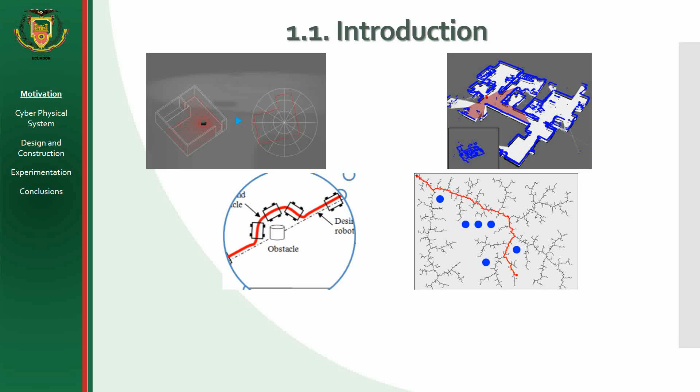Nowadays, there are commercial and research mobile robots that recognize their surroundings, have autonomous navigation, and also obstacle avoidance. That is because they use complex algorithms. These robots have purposes such as security and defense, services for vulnerable people, education and research. However, due to the high degree of autonomy, it is difficult and expensive to obtain one in developing countries such as Ecuador.

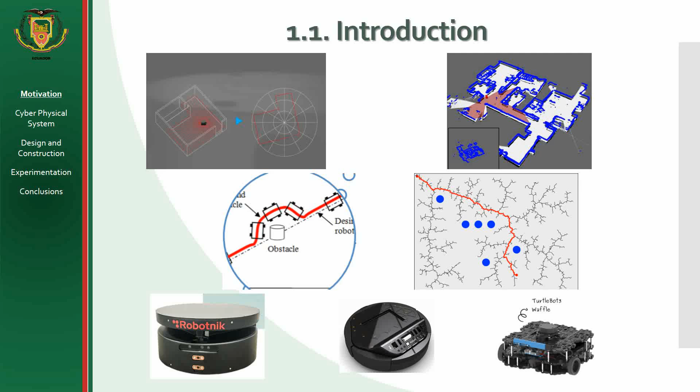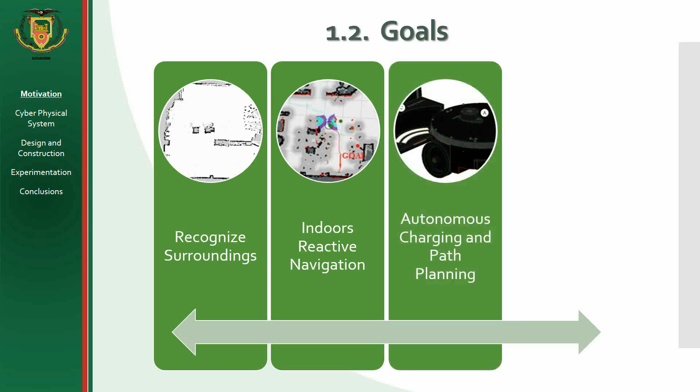In this context, the goals were set. A platform is needed that recognizes its surroundings, able to do indoor reactive navigation with autonomous charging and path planning. Finally, all the systems should be scalable and stable, but with a low cost.

According to Bricknell, mechatronics and CPS are two different perspectives of a global concept called system. Mechatronics is considered here as an evolution of electromechanical products, and CPS comes from a cyber system evolution. This helps to explain why there is a strong software and communication dimension in CPS.

A cyber-physical system approach ensures a low cost by increasing the capacity of sensors and actuators. Moreover, it also gives the opportunity to use wireless communication and increase bandwidth. A CPS complements a mechatronic design due to its advantages, such as scalability, stability, robustness, among others.

With this information, it is necessary to know what low cost is. Some commercial robots are compared in the table shown. The parameters of comparison are the characteristics mentioned before. Here we compare the robots Kobuki, RB1, RB2, Freight, and TurtleBot that give a hint of how the design should be and how much money it should cost.

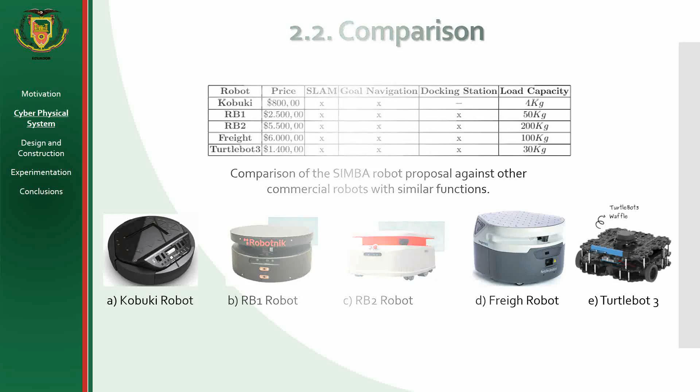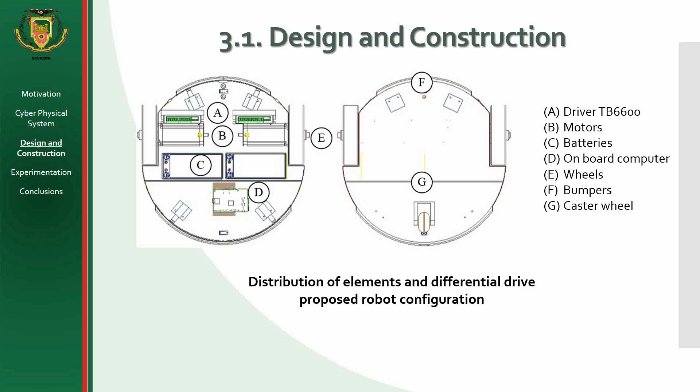A configuration with capacity to climb small slopes up to 10 degrees and with the capacity to navigate through different floors such as carpet or ceramic was designed. Differential locomotion with a caster wheel of 5 cm was used to allow movement on irregular surfaces. The structure of the mobile robot is circular in order to avoid close obstacles, especially when it turns over its own axis.

The robot has a maximum diameter of 48 centimeters and a height of 60 centimeters, which gives the ability to go through doors and tight holes. The mechanical design allows the robot to climb obstacles with a maximum height of 6 centimeters. The maximum speed of the robot is 1.5 meters per second. The maximum payload is 5 kilograms and its own weight is 10 kilograms.

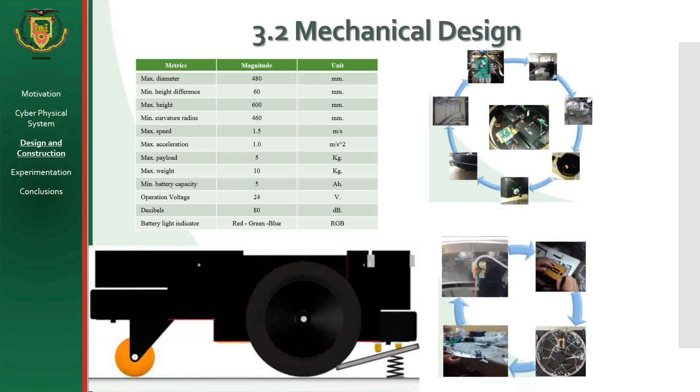There are two batteries connected in series that give the robot the 24 volts necessary for the motors. Here is shown the process of the chassis construction, then sensor distribution and placement, and finally the design of the charging station and the hold-up mechanism. To ensure the mechanical capabilities of the robot, computer-aided simulation of all the structures was carried out.

In the software development, the mobile robot software was embedded into the onboard computer Raspberry Pi 2. It has connected the RPLIDAR that communicates with the microcontroller. The robot is connected to an external computer via Wi-Fi in a master-slave configuration based on TCP/IP protocol to connect between computers. The onboard computer executes all the functions over the motors and sensor data.

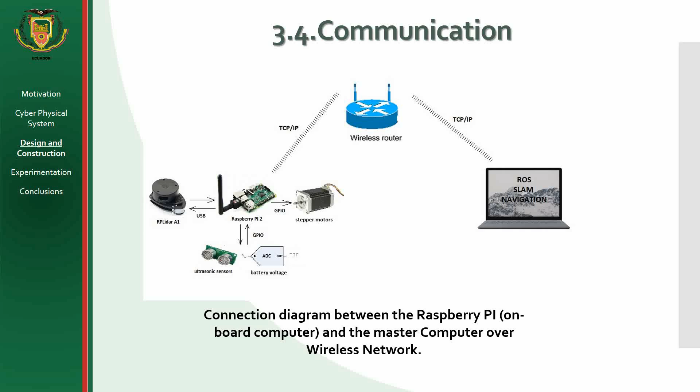The master computer executes the simultaneous localization and mapping (SLAM), navigation and planning trajectories, and auto-positioning for the charging station. A navigation algorithm with obstacle avoidance and trajectory planner has been developed. The main goal of this algorithm is to navigate from the initial point to a goal, dodging obstacles and people present in the maps. The dynamic window approach and the trajectory planner A* make it possible.

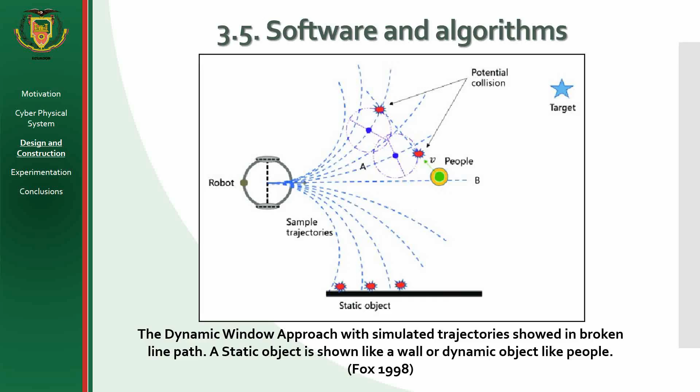The dynamic window approach algorithm has a local planner that requires the robot know its position all the time. For this reason, an adaptive Monte Carlo localization particle filter is used to adjust the robot position in real time. The action of the dynamic window approach algorithm and its simulated trajectories are shown in the map. The action of the RPLIDAR with the information collected by the ultrasonic sensor are updated periodically.

The sensor locates the position of the obstacles and the algorithm discards trajectories where a collision is detected. A search for the best command of velocity and acceleration with obstacle avoidance and minimum travel distance is done in real time. The platform has the ability to recharge autonomously. The machine and the docking station have two contact points that allow to charge the robot just by the correct placement.

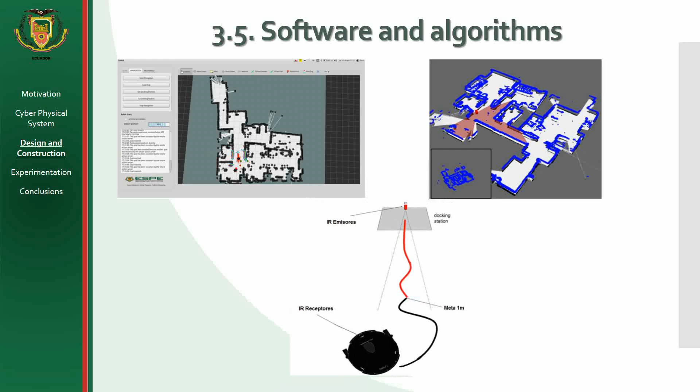A system with 3 infrared emitters was implemented in the docking station and 4 infrared receptors in the platform. To ensure the charging cycles were autonomous, the information about the battery level is obtained by a circuit in the robot. The first experiment was to test the mapping velocity. The objective was to get a clear map of an area with the measured velocity. To carry out this experiment, 4 velocities were settled down:

0.5 meters per second, 0.35 meters per second, 0.2 meters per second, and 0.17 meters per second. As it is shown in the figure, C and D were good options, but in an error analysis, the best velocity was 0.17 meters per second because it has the lowest error.

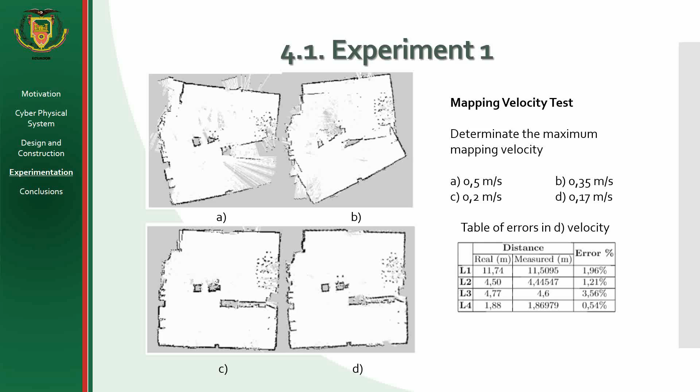The second experiment was the path planning and navigation test. In this experiment, the robot has to plan a path to the goal. If there is any obstacle, it will recalculate its trajectory. Finally, the real position is compared with the goal. And as can be seen in the table, the maximum error was 4.53%.

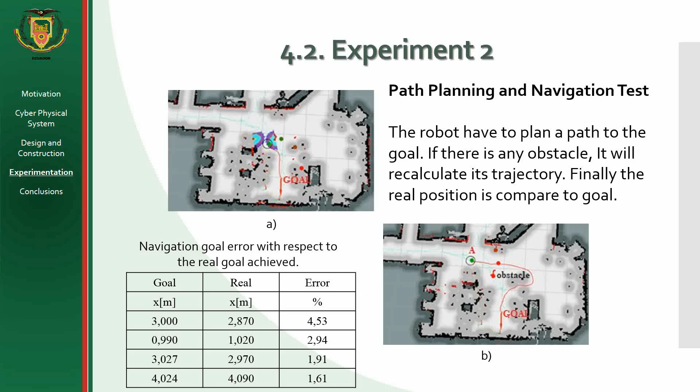The conclusions are: the robot can make curved and straight paths at 2 rads per second and 0.69 meters per second respectively. The maximum payload of the robot is 5 kilograms, and the energetic cost is 6.34 amperes. The robot is able to get a good autonomous self-positioning in the charging docking station by infrared sensor use.

The robot can map with a maximum error of 3.56% with a velocity of 0.17 meters per second. It also has obstacle avoidance based on trajectory planning using dynamic window approach. And finally, as a CPS platform, it is shown that it has the capacity to connect through IoT protocols and be used as part of more complex systems in the future.